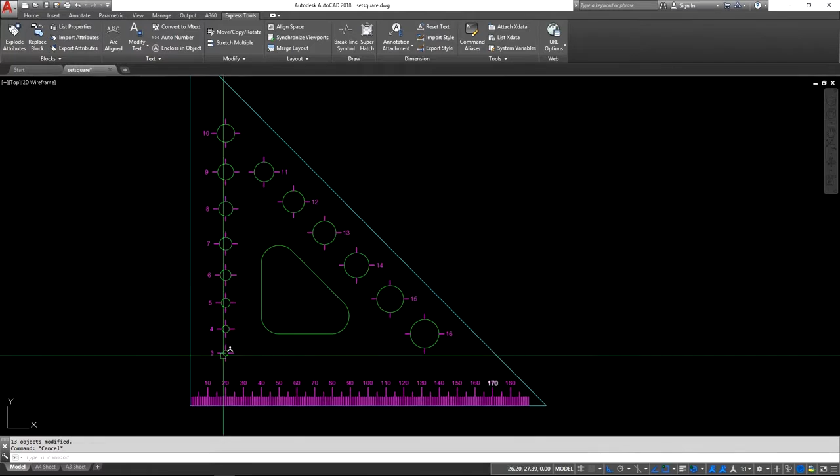All right, the last thing we need to do to finish this tutorial and this object is convert the text into usable objects. Because at the moment, text as it is, when we bring that into our laser software, it won't recognize this because it can't see these as vectors. Even though it's vector text, it needs the vector lines to be able to work with.

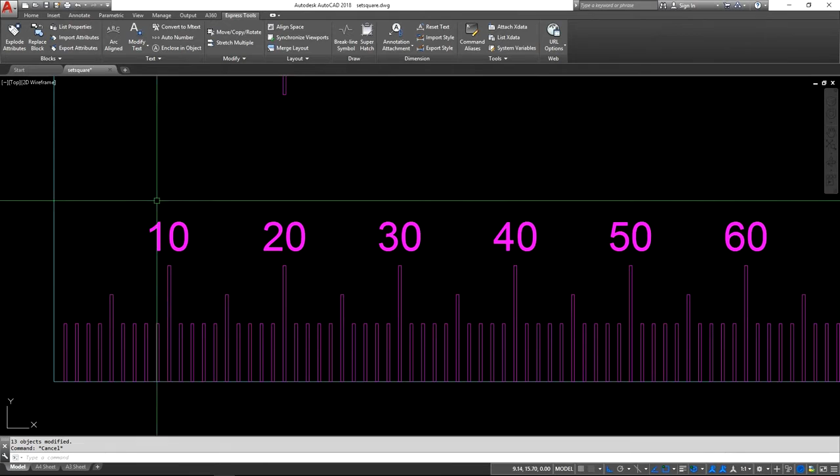So the next step would be to take these numbers here and convert them into vector outlines. The way we do that is under Express Tools, we're going to use this little button here. It's called Explode Text. You'll see if you click the Modify pull down, that's Explode there. So that's the one we're using.

So I'm going to select Explode Text, zoom out, and select everything. Now it will ignore everything in the drawing except for text.

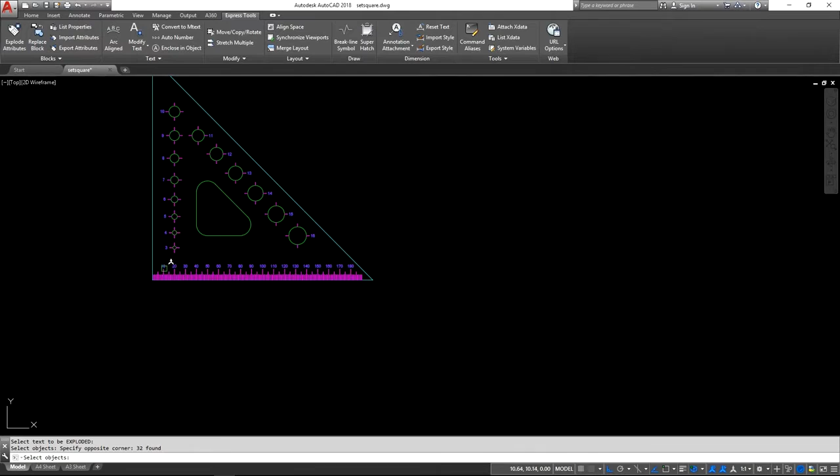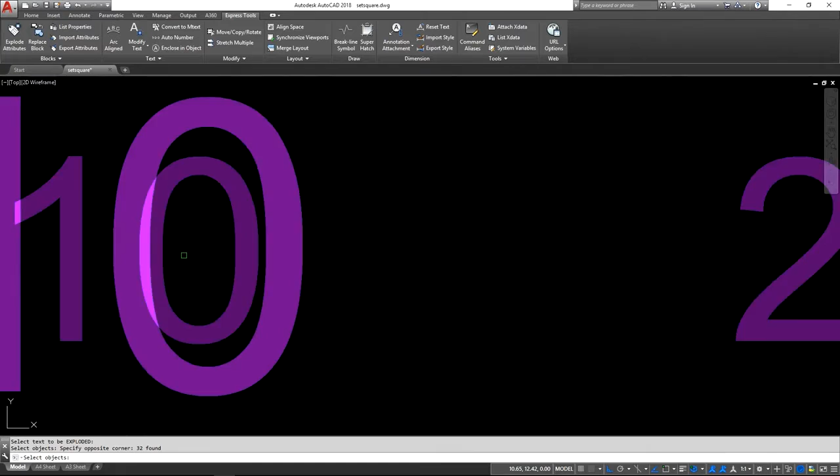Now here's the really important part when you're exploding text. What you need to do is zoom in nice and close, make it as big as possible when you explode it. The reason is if I was to zoom out, say here, when I explode it, the vector outlines or polylines it's going to draw will be very jerky. If we want a nice smooth outline, we need to zoom right in. So I'm going to zoom right in and press enter.

And now, as you can see, we've still got a little bit of jerkiness around those lines, but you've got to remember this text is only 2.5 mil high, so when we're actually zoomed out, it's going to look fine.

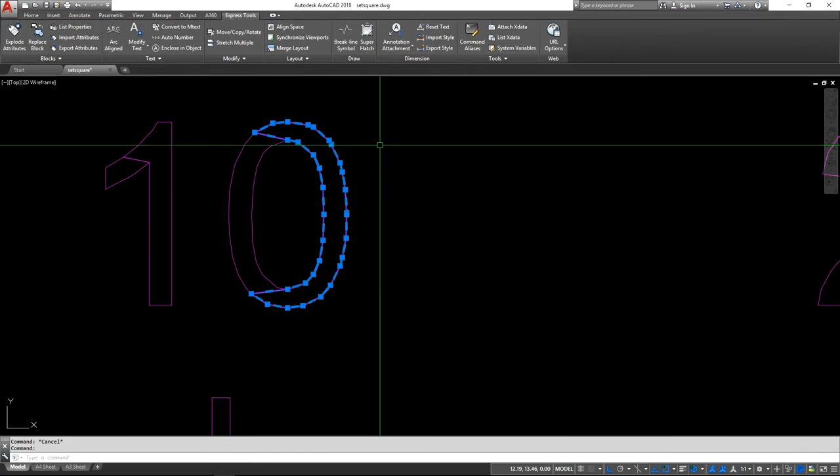Now one of the issues we have in this case is you can see it's broken it up into all of these individual parts. Technically we could get away with that for engraving, but it's not the neatest sort of form of lines, and I'm not happy leaving it like this.

So what we're going to do is there's a little roundabout way we can fix these up quite easily, rather than going through and selecting each one of these and trimming and joining and all that sort of stuff. We're going to use some of our 3D tools to do the work for us.

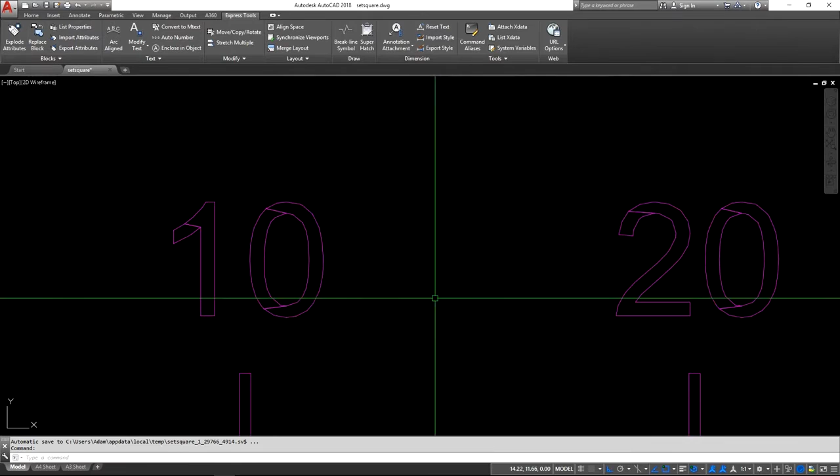Now to do this, what we need to do is go back to the Home tab, click on the Draw pull down, and the tool we're after is this little one right here. It's called Region. The quick key is REG.

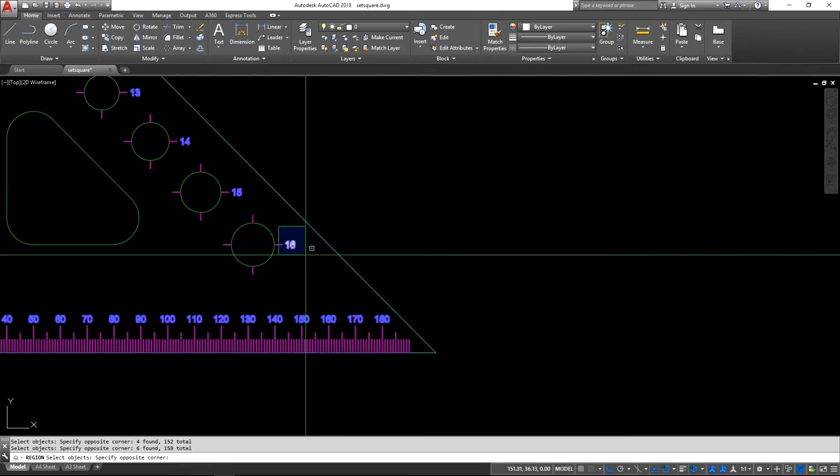So I'm going to select that, then zoom out and select all the text. Make sure you only get the text, because we don't want to be turning all our other lines and stuff into regions. I'm using crossing windows over all of these just to make sure I only get the text, and I get all of the text. So once I've done that, press enter and you'll see now they've all converted into regions.

Now one thing you need to look at, I'm just going to expand this command line by pressing F2. So here's our window. One thing you've got to look at here: we've got 164 loops extracted, 4 loops rejected. That's an issue there, and it tells us that it's rejected them because they are self-intersections. What that means is it's got a line that goes along and then comes back on top of itself. So we ended up with 160 regions created.

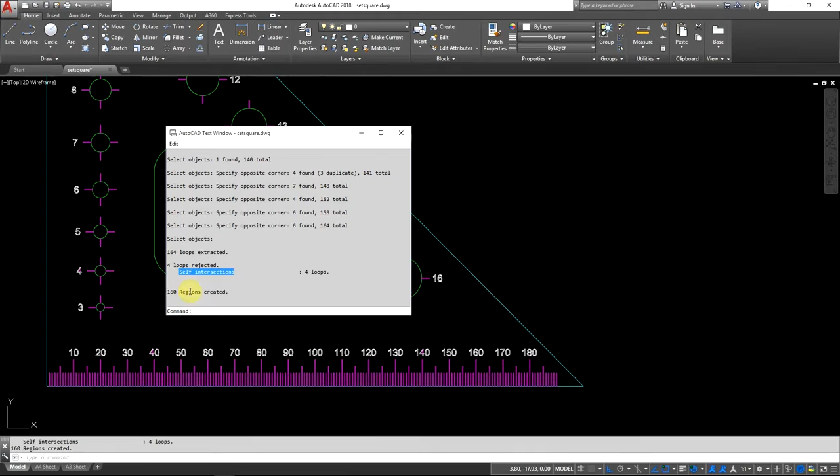So we need to go and fix those. The way we do that, first thing is we've got to find them. If you have a close look, you'll see these lines here didn't change. If I select it, you'll see we've got a line traveling back over itself. Easy way to fix this one is just click on that, pull it back this way. Again, using ortho, we now have gotten rid of that intersection.

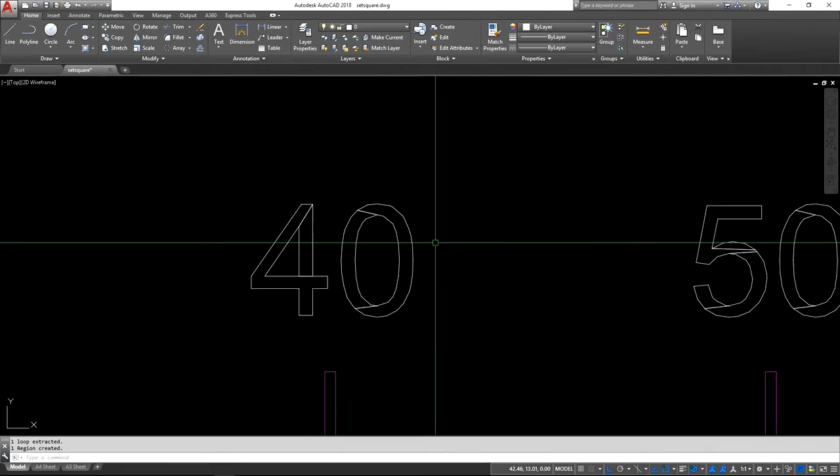So if I do the region tool again and select this object, enter, you'll see it turns into a region fine. And down here, one loop extracted, one region created. So I'm going to go and find the other issues and do the same thing. As you'll probably find, it's all on the number 4s. Now this will vary depending on the font that you use.

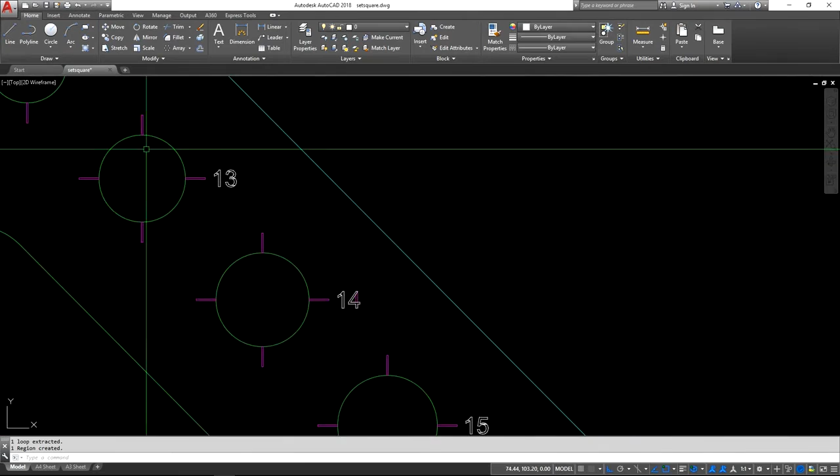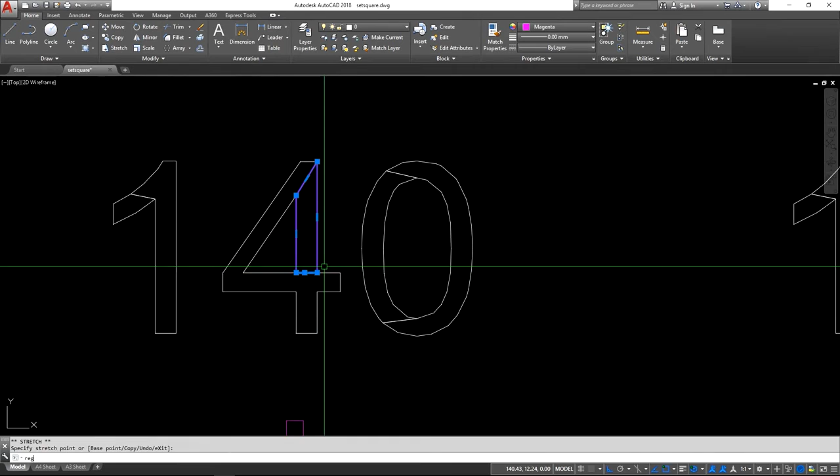Not every font will do that. So I'm just making my way through it, double checking. That all looks fine. Again, the number 4 is the issue, so just quickly fixing that up, taking that to there. REG, select it, enter. Finding the next one. So that's 3 that I've done, and there's the 4th one. It's all the number 4s. REG, select, enter. So now I've converted all the text into regions.

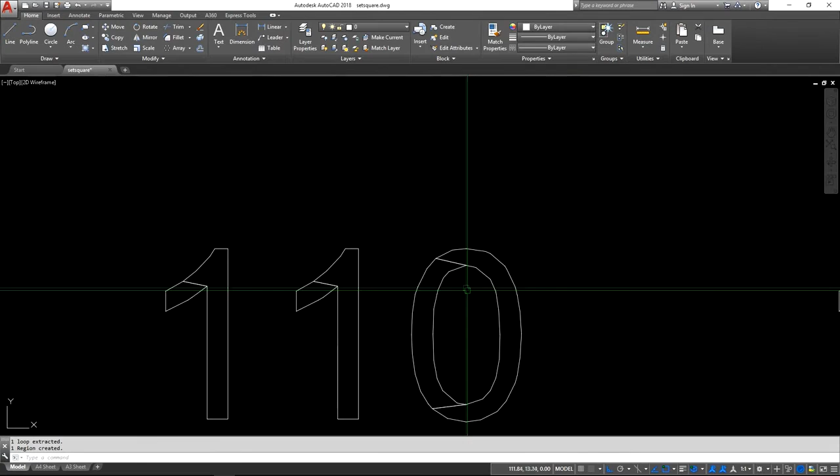In order to get rid of all these lines, we're going to use a tool called Union. You can find it if you go under your workspace settings and change your workspace to 3D modeling, but for this exercise we're just going to use the shortcut key, which is UNI.

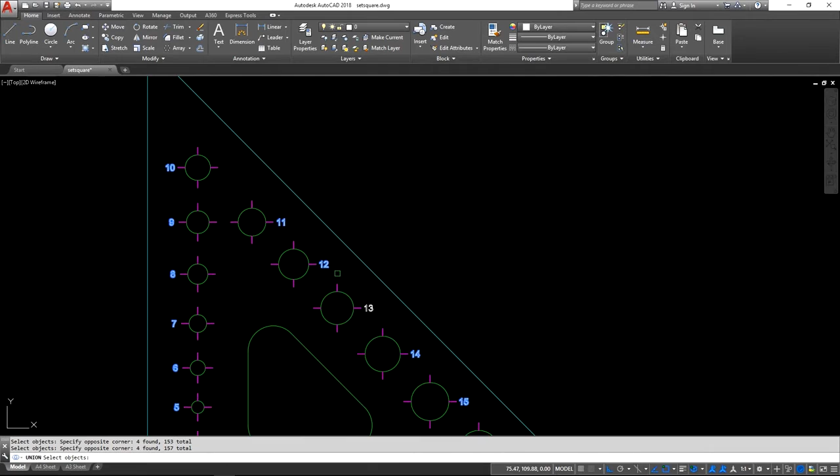I've typed in UNI, enter, and all I'm going to do is select all the text, just like we did before. Once we have that selected, I'll zoom in on one of these so you can see what happens when I press enter: all those lines disappear.

So what it's actually done is joined all these pieces up by turning them into regions, which is like a 3D flat object with a sort of plane on it. By using the union tool, it's merged those two planes together.

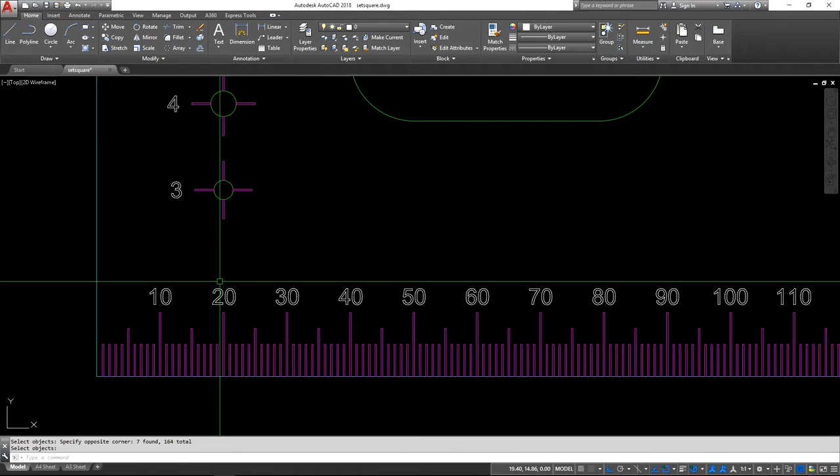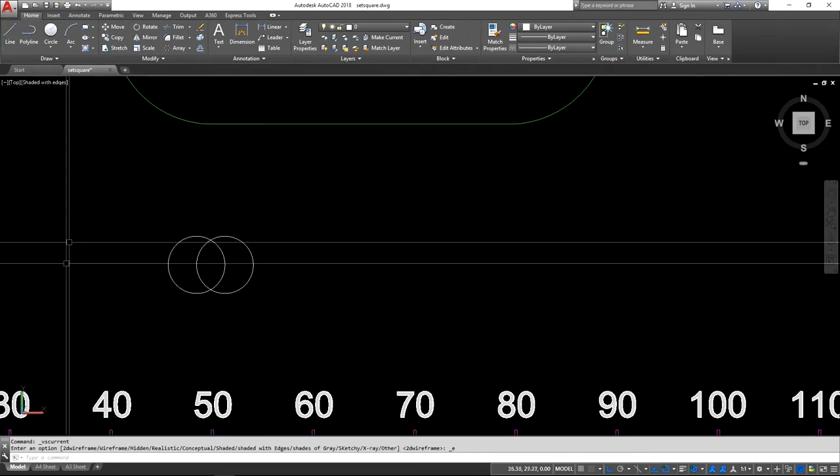Now I'll give you a quick demo so you can see what we're talking about in terms of regions. I'm just going to draw two circles. To demonstrate this, I'll click on 2D wireframe and change it to shaded with edges. Now you'll see all the objects we've already done have changed color, but these ones haven't—they're just plain circles.

If I double click on it, it tells me it's a circle. So what I'm going to do is region these. If I go region, click on both of those and press enter, you'll see these have changed the same color. If I double click on it, it tells me it's a region—think about these as flat planes.

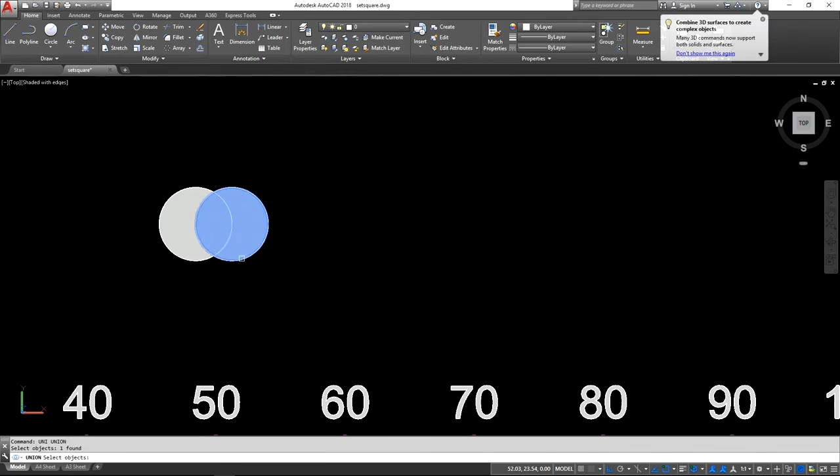Now by using a tool called Union, UNI, and selecting these two, it joins those two together. It becomes one—you've unioned them into one.

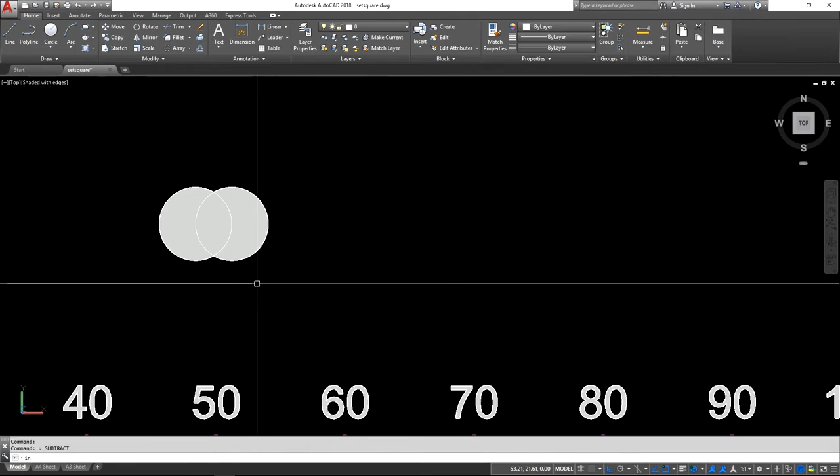There are other tools we can use, like subtract, so SUB, and we can subtract from that one, enter, and we want to subtract this one, and that gets rid of that. There's also one called intersection, INT, and if we select both of those, it gets rid of everything that's not intersecting. That just gives you an idea of what regions are and how they work.

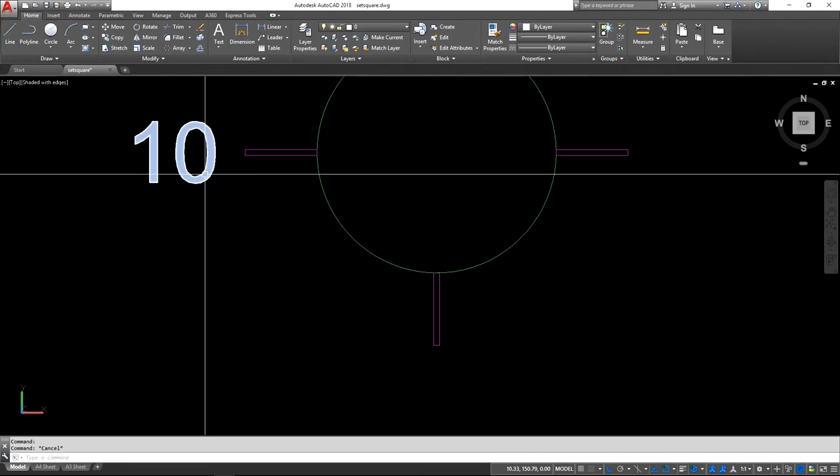So the next step—I'll leave this shaded with edges on so you can see what's happening. Now, the laser won't read regions, so what we need to do is go through and explode all of these because we need to get them back into polylines like this.

I'm going to use my normal explode tool and go through and select all the objects again. There we go, they're all selected. Press enter. Now I've exploded it once, but notice they're still solid like this, which means they're still regions.

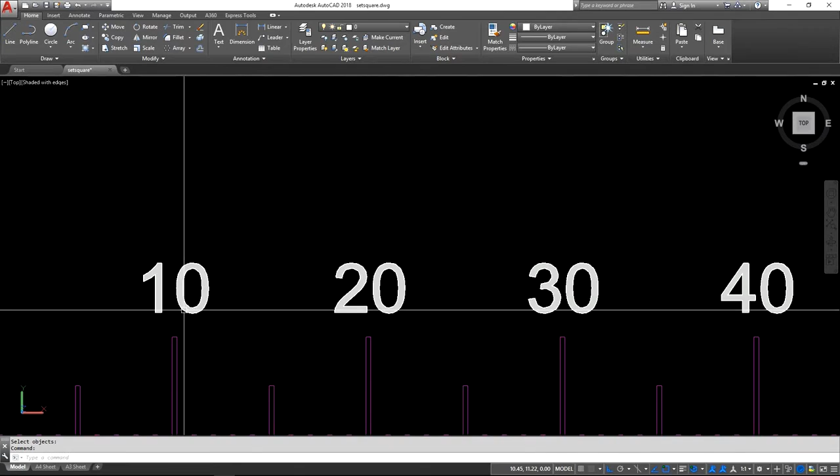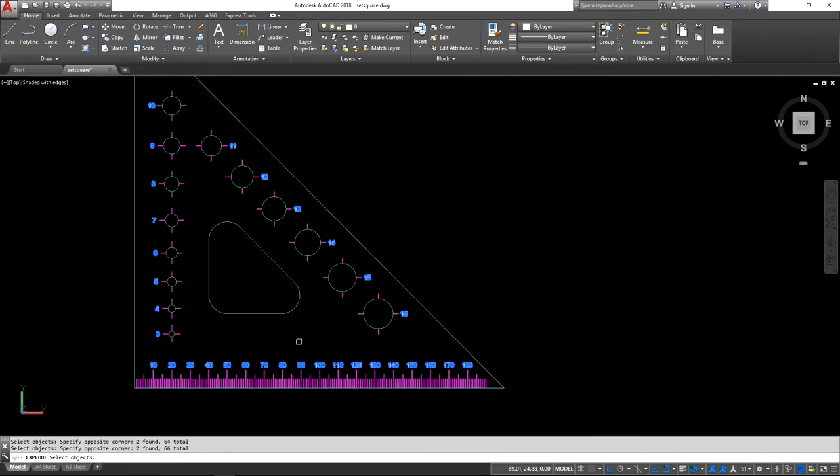So I'm going to need to explode them a second time. This time I'll have to select them all individually. And pressing enter, now they've all exploded, as you can see, into polylines.

So as you can see, we've got all these individual line segments all the way around. Now that we have them all into vectors or simple lines, the last thing we need to do is join them. I can get away with what I'm about to do because none of these bits of text are touching any of the circles or lines, but normally I wouldn't recommend doing this.

So what I'm going to do is use join—go to modify, use the join tool, and just do a blanket window select like this. As I said, I wouldn't normally recommend this, but because these are all closed polylines, they won't join to these. Same deal with all of those parts there, so it's only going to join the text.

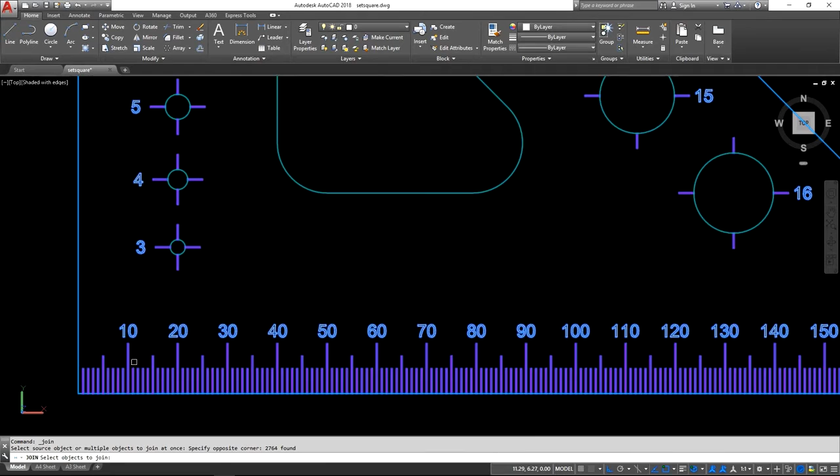So, enter. What we're looking at down here: 2,502 objects converted into 110 polylines, and 262 objects were discarded from the operation—that's all the little increments, circles and bits and pieces that it discarded.

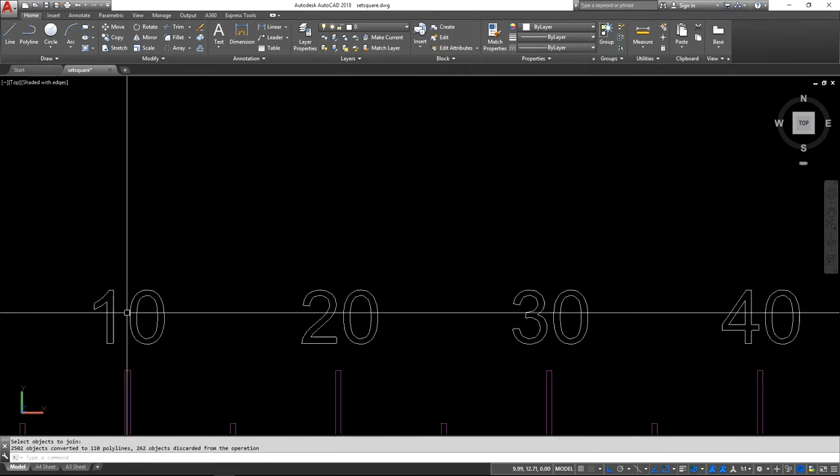So if I move over them now, you'll see these are now all polylines, and they're all joined, so they're just like any other line, which means we can now engrave. What I'm going to do is use my match properties to change all the text into the same color that I'll be using for engrave, just to make it easier for the laser.

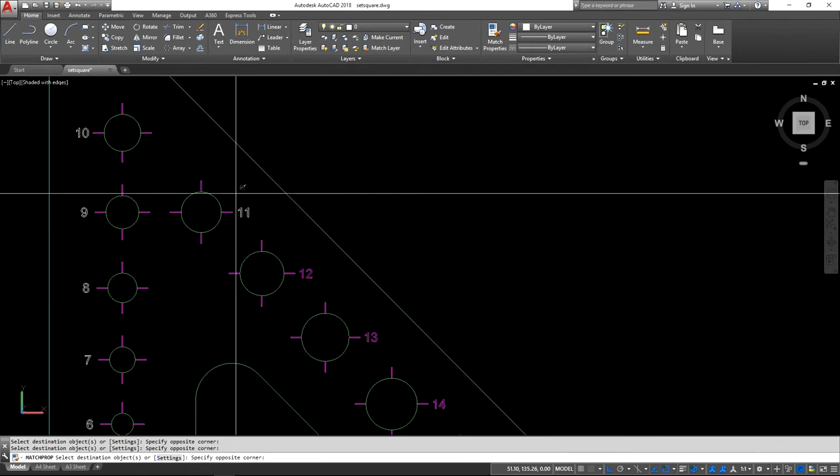So selecting all of these, and once we're done, that is it. There you go. That is all now ready for laser engraving and cutting. So the only thing that's left to do is export this.

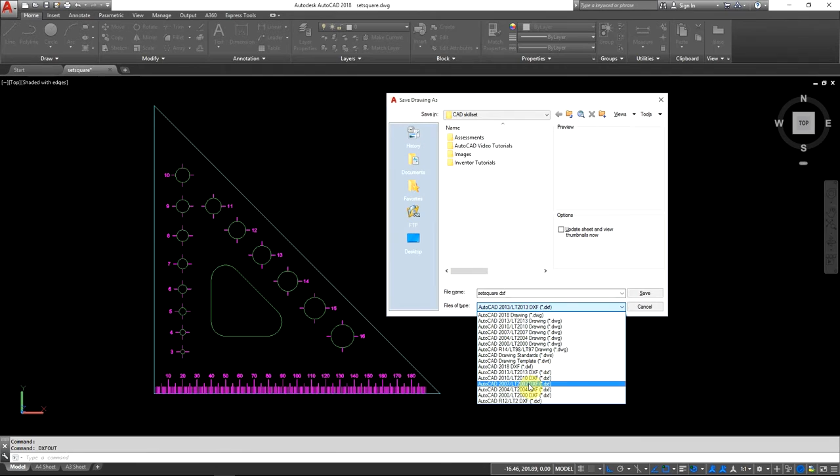Now, the laser that we're using uses the DXF format, so we just need to save this as a DXF file. There are a number of ways we can do that. One of the easiest ways is just by typing DXF out as one word. You can see in the command line, DXF out, pressing enter, and then all we need to do is make sure you choose a 2007 DXF, this one here.

And then save, that's it, done. Now, doing DXF out, what that will do is if you have anything else on your drawing, it will DXF that out with it, okay? So you won't just get this object.

Now, in order to be able to get just this object, so let's say we've got a few others floating around on the drawing and we only want this piece here, rather than using DXF out, we're going to use the write block command. Now, where you find that is you can either press W, that's probably the easiest way, or you click on the little insert tab up the top, and we're going to come down to where it says create block, click the pull down, and we want write block. So it's far easier just to press W.

Write block, and in here, what we're going to do is we're going to pick a point. So generally, in this case, I'm clicking 0. Now, if you want to leave it at 0, you didn't need to click pick point because that was already at 0, but you may want to bring it in from somewhere else.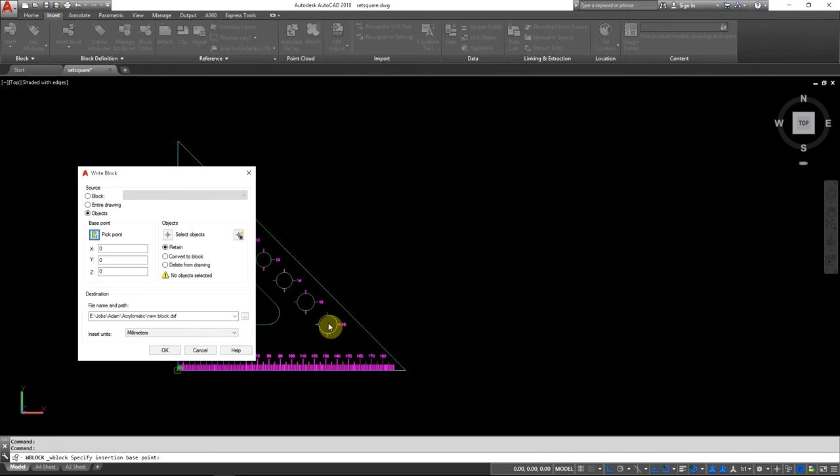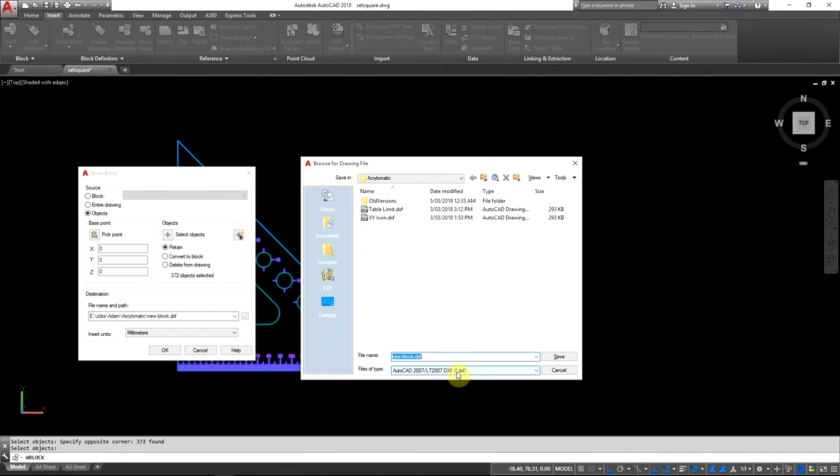Okay, so from there, we're going to select objects. In this case, I'm just going to select everything, enter, and you see it's got 372 objects selected. And then what we're going to do, just down in here, we click this little button, and then you're going to go and find the folder that you want to save it in, and again 2007 DXF. Okay, and that's pretty much it for that.

The other way would just be to go to the application button, click save as, and go to other formats, and then just down in here we change that to 2007 DXF. Okay, that's pretty much it.

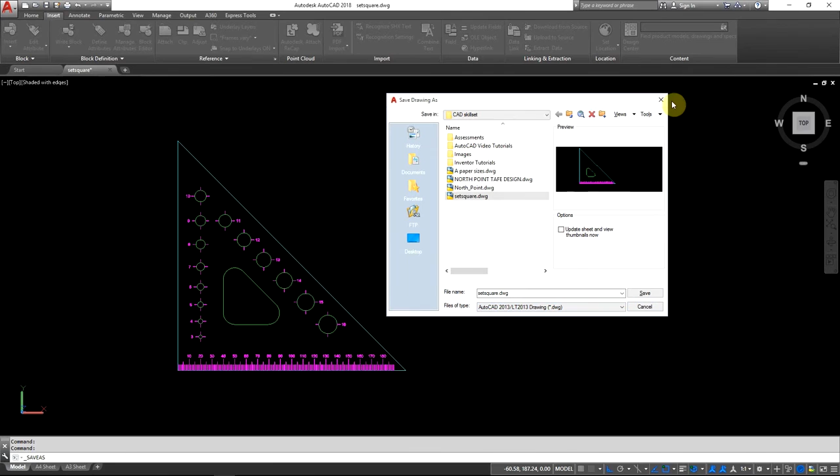Now, one thing we want to do before we get into the exporting and all that sort of stuff, I should have mentioned this earlier - we just want to do a quick bit of housekeeping on here just to make sure we don't have any lines on top of lines, overlapping bits and pieces, or duplicates. Now, this is a good habit to get into, so I'm going to run through it right now.

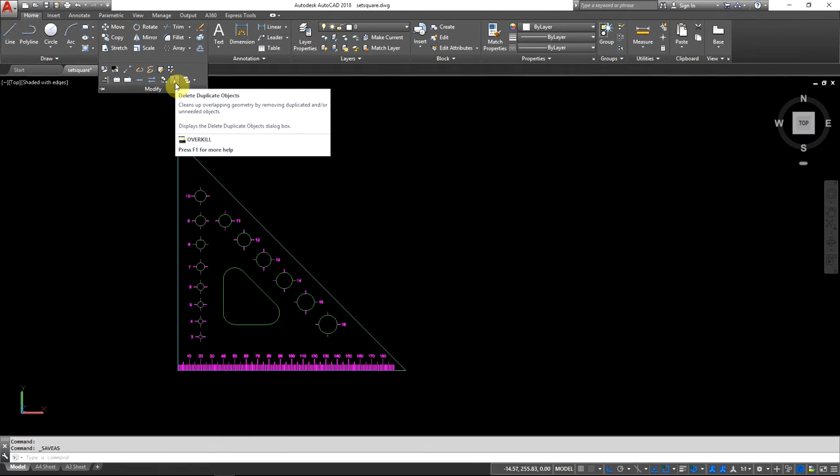We're going to click on modify, and just down here we've got this little broom icon. It's called delete duplicate objects, or overkill is the command. So you can just type in overkill in the command line if you like. But we're going to select that, and we're going to draw a window over the objects that we want. You can select your entire drawing if you like. Press enter, okay, and we get this little picture here.

So this little box pops up. Generally, you can just leave this as it is if you're overkilling the whole drawing, but if you want to filter out particular things like colors, layers, and all that sort of stuff, you've got the option to do that here with the checkboxes. And this is the tolerance - what we're looking at here is anything smaller than that, it will ignore, anything bigger than that, it will work with. You can change that to 0 if you like, it doesn't really matter. But again, this is just to filter out particular sized objects.

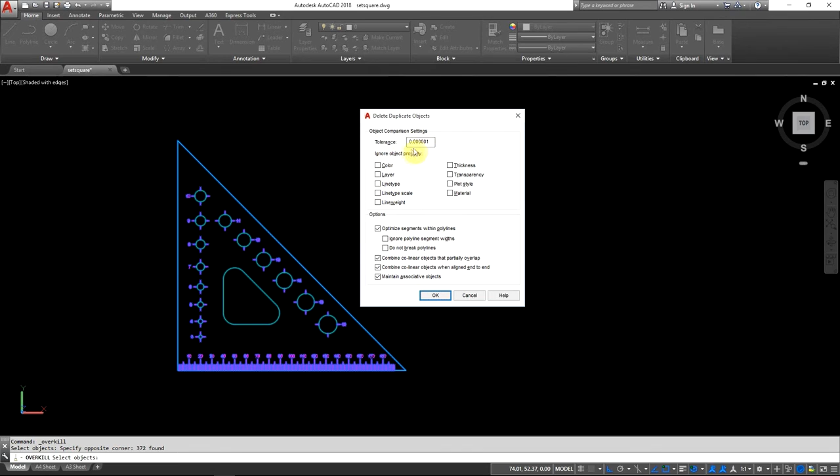So I'm just going to go ahead and click OK. And what you see here, I've got 0 duplicates deleted, and there was 12 overlapping objects or segments deleted. Right, so that was a bit of an issue. We had 12 overlapping objects - we should have had 0 and 0 for all of that. So it's somewhere along the line.

It could have been with the explode options, it could have been with any of the copy options and all that sort of stuff. But somewhere along the lines, we've ended up with 12 overlapping objects. But good housekeeping there.